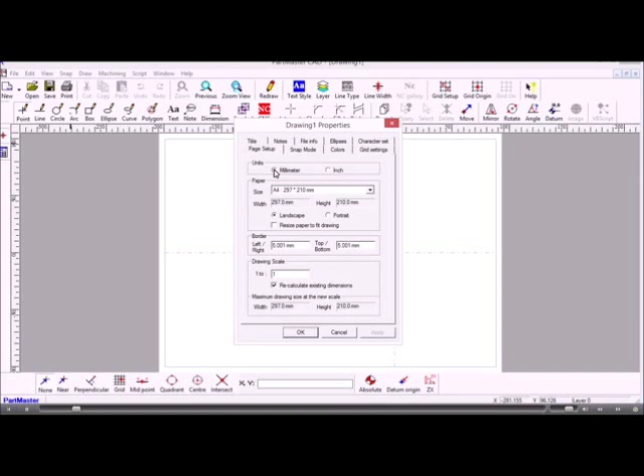If I need to, I can move the datum. If I'm working on quite a long part, I might want to move my datum to a different location. So that's just reset the datum, which is normally in the center of the piece of paper. To set the units that you're working in, go to View, Properties. I'm working in millimeters, you could work in inches, but it's all the same.

So the first thing to do is to draw a couple of center lines on. So to do that, I use Line, and then the second option down is Line at an Angle. So this is the line which is going to act as a center line, and I need to lock this line onto the datum point. So I do that using the snap modes, which are at the bottom toolbar here,

and I'm going to use near snap. So what that does is it snaps the line onto the nearest point that it can find to the cursor. Now on a blank drawing, the only point that it can find is the datum, so even if I move the cursor quite a ways away, it can only ever find the datum point. So I click to accept that.

Now I need to draw another line, so I stay in Line at Angle and go to the Properties tab and set the angle to 90 degrees. And again, I'm staying in near snap mode, so the line will snap onto the datum position. So having got those two lines there, I can now draw lines which are parallel to it. So I'm still in line mode, which is okay, so I just go into parallel mode.

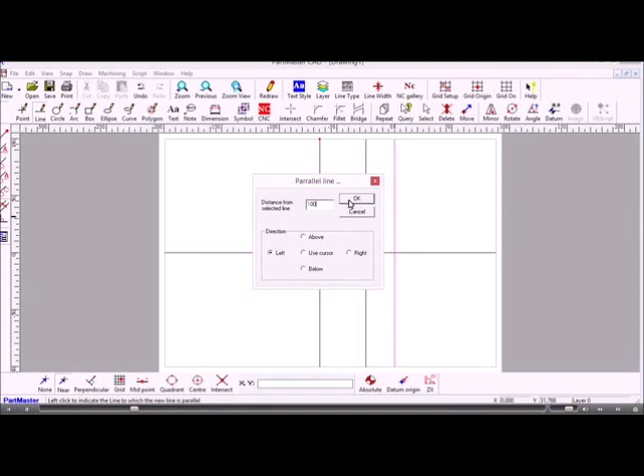So I'll just draw up a simple step shaft. So we'll go 25mm to the left, 65mm to the left, and 100mm to the left. So those are the shoulders. That's the first shoulder, that's the second, and that's the end. So now I'll use the horizontal line and go 10mm above, 15mm above, and 25mm above.

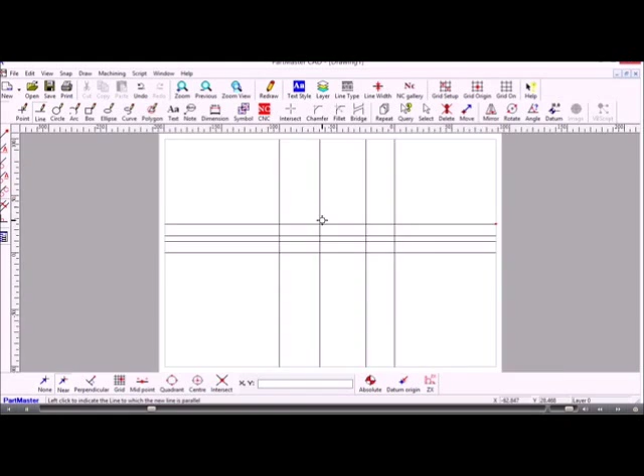Okay, so I'm just going to use the center mouse wheel just to zoom in on there. So what we're going to have is that's the datum point there, come up, we'll have a little chamfer on the corner, put a little fillet in here, and so on. So to do any of those operations, we use these icons here: Intersect, Chamfer, and Fillet. So I'll start off using the Intersect command.

Now what that does is it performs a function where lines, arcs, or circles intersect. So what it actually produces will depend on the option that you've taken from the vertical toolbar. So create a node will create a node point, i.e. a point that you can subsequently lock onto. The second one down is to clip items. Third one down is clip first, so only the first item you choose will be clipped.

This one here splits the items or breaks them apart at the intersection point, and this one here produces a split or a break point at the midpoint of the line. This option here is the auto function, which can be switched on or switched off. So to start with, I'll switch it off and show you how we use the option clip items.

So what we need to do is, supposing we wanted a sharp corner here, so where those two lines intersect each other, we'll be clipping them, which is a term we use for trimming or extending. So the rule is that you always point to the part of the line you want to keep, not the part you want to get rid of. So looking at that entire line there, where the intersection is, I want to keep the portion below the intersection.

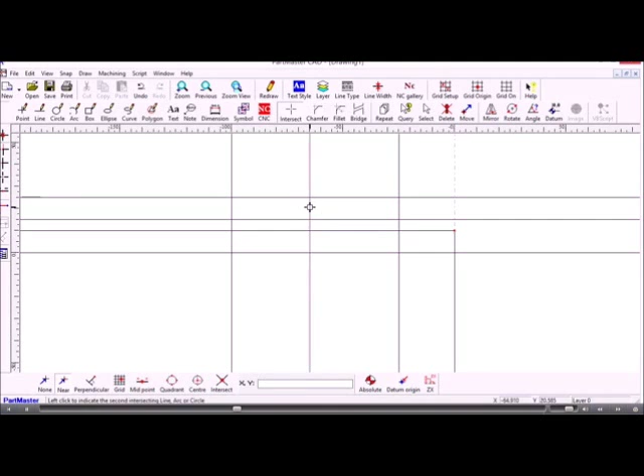So long as I click somewhere here, okay, that's identified the first line, and now the second line here, at the intersection point, the portion I want to keep is over here, so I point there. Okay, so that clips the lines at that intersection point. And we'll use the similar function over here: first one, second one. Right, so that's shown you just simple clipping the items.

If, however, I switch on the auto function and then move the cursor into the drawing area, what that does is it will automatically find any points that intersect and perform the clipping function on those two lines. So in this case, the big blue rectangle is showing me the intersection point, and the two little tracers which move as I move the cursor are showing me the parts of the lines that will be kept

after the clip operation is completed. So I simply move the cursor around until the tracers are on the two parts that I need to keep. So this is just a single click operation rather than identifying the two lines. Okay, so just to go back, that was using the auto function that you can switch on or off as you need to.

So in this position here we'll put a fillet. So we go to fillet, and from the options toolbar we choose the items that we want. So the first one is to keep the items, so the fillet gets drawn but none of the lines which are tangential to it have anything happen to them. They stay as they are. Clip items will clip, i.e. trim or extend the lines as required. So this works in exactly the same way as the intersection.

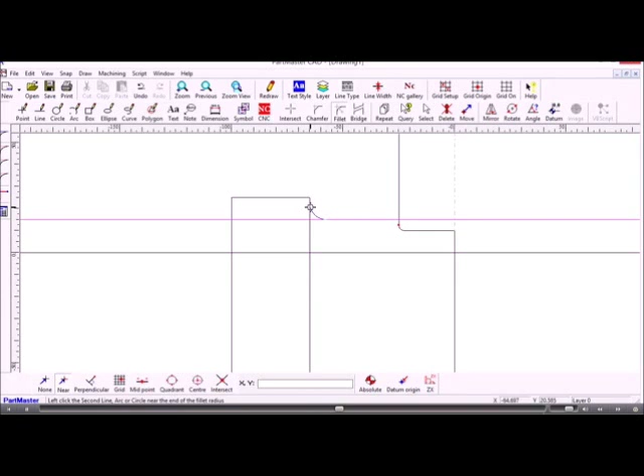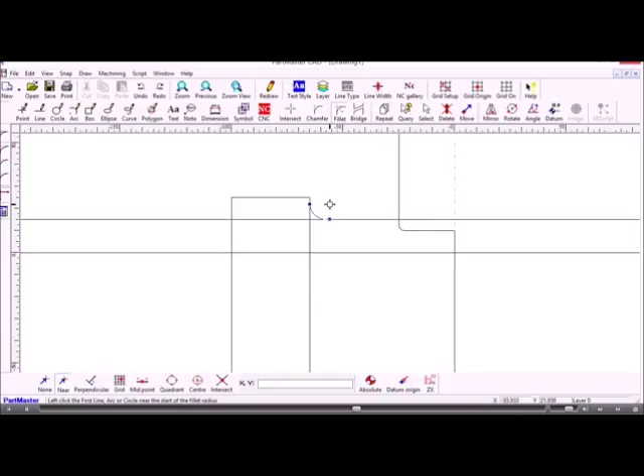Okay. Now if I just undo that, then I'll show you the same thing, but this time switch on the auto function. So with this, it's similar to the intersection. I simply move the cursor into the drawing area, and when it finds a position where it's able to fit the fillet, it shows me the fillet drawn, and it shows me those two tracers which are confirming that these are the parts of the lines that will be kept.

So that's that. So now I'll put a chamfer on this corner here. So chamfer works in exactly the same way as fillet, although it produces a chamfer rather than a fillet. But the option I want is to clip items, and the properties I want is the size of the chamfer. So in this case here you can see how the auto function is switched on. Now if the chamfer is very small, you'll need to zoom in and then hold down the center mouse wheel and use that as a pan function, so that you're clear that you're choosing the correct position.

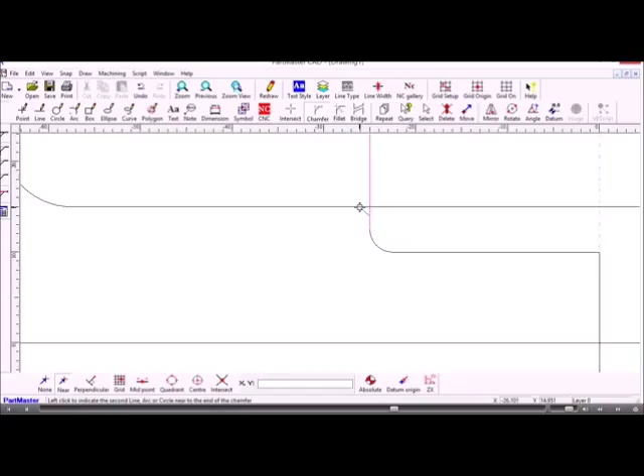But if you don't want to use the auto function, you switch it off and then you simply indicate the lines where you want the chamfer to appear. So the same thing can apply here if we wanted to put a chamfer on there, and the same thing could apply if we want to put the chamfer on the back face there.

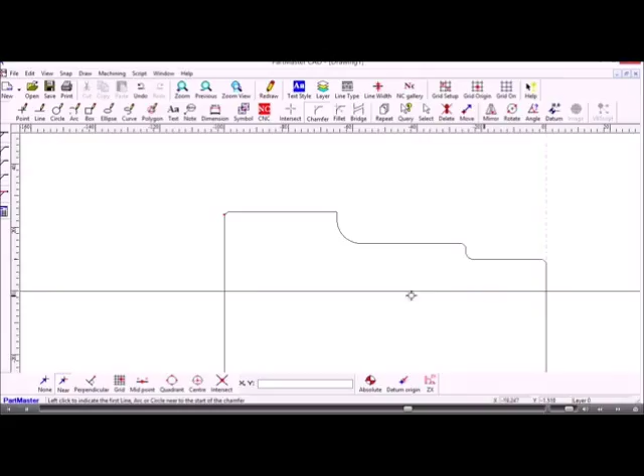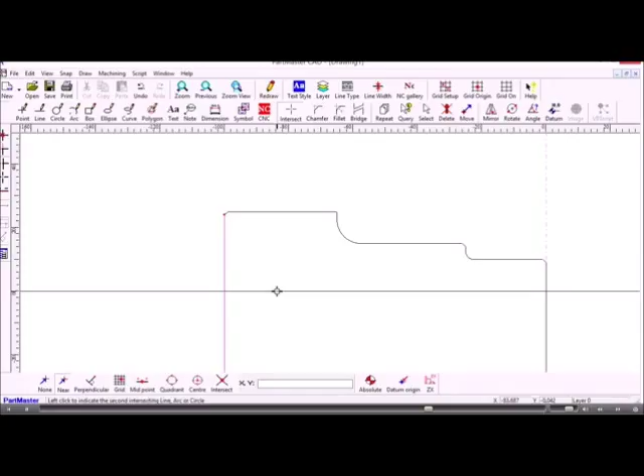So the last thing to do here would be to trim these lines back to the center line. So to do that I can use Intersect, and I'm going to use the option Clip first. With this, the auto function is not available because you have to choose the lines in the correct order. So looking at this line here and the horizontal one, that's the intersection point. The segment of the line I want to keep is this one, so that's the one I click on, and that line will be trimmed to the center line. And the same thing here, there to there.

Okay, so we've created the geometry. If you don't want to keep the center line on, you don't need to. It doesn't matter if you keep it or not, but if you do want to delete it, then you go to delete and then simply click the line. So that's produced the geometry. The next stage is to create the profile, and then we'll take that through into machining. So to create the profile, we use the big red NC button here.

The first thing you need to notice is where the datum point is. Now the datum point for the geometry will be the default datum point for machining, but if you need to change your machining datum point, you use this icon here, and therefore you can reset the machining datum to somewhere other than the drawing datum, but in most cases the two will be the same. So that's just positioned the datum.

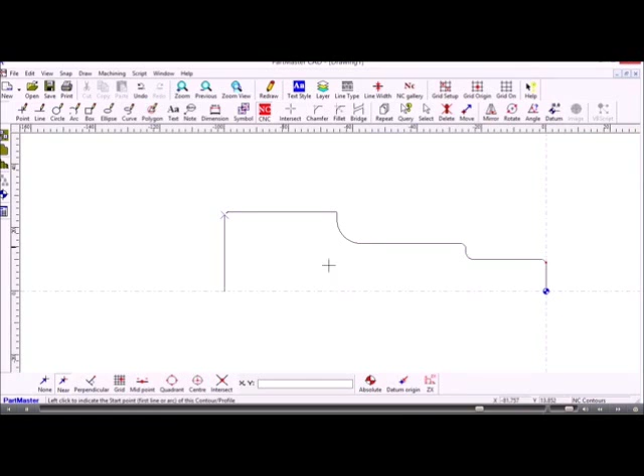Now we need to create a profile. So a profile is a series of linked line and arc segments that the machining software is able to follow. So the first span I want to machine will be somewhere over here. So it would be unwise to create the profile going in the backward direction to the general direction that machining is taking place. So I click on the line there, and in the dialog box that is presented to me, I can leave all the defaults as they are.

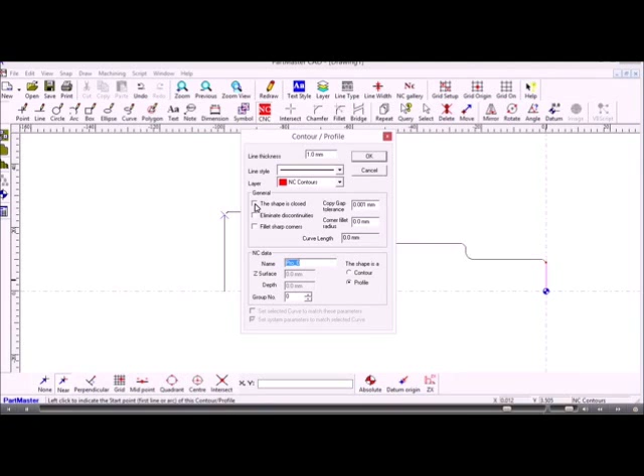One thing to bear in mind under the general tab here is that the shape is not closed, and because it's not closed, i.e. the start point is not the same as the end point, I need to tell it where the end point is. So when I click OK, the system waits for me to indicate the end point. If I'm not sure of what the system is expecting at any time, the bottom left here next to the word Part Master, the help message will tell me what the system is expecting. So in this case it says left click to indicate the end point of this contour or profile.

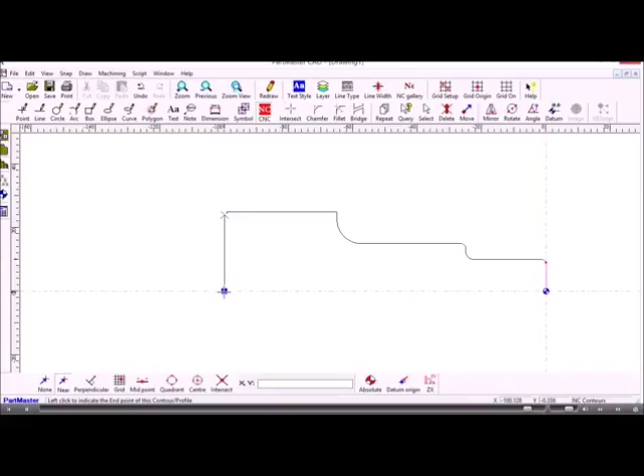So as you can see, as I move the cursor around, it's locking on to any of the points that go to make up the geometry, and I want to choose this point here. Even though I may never machine that, it's better to choose that point there and have a profile which starts and ends on the center line. So that's created the geometry and then created the profile, and we'll come on to machining in the next video.